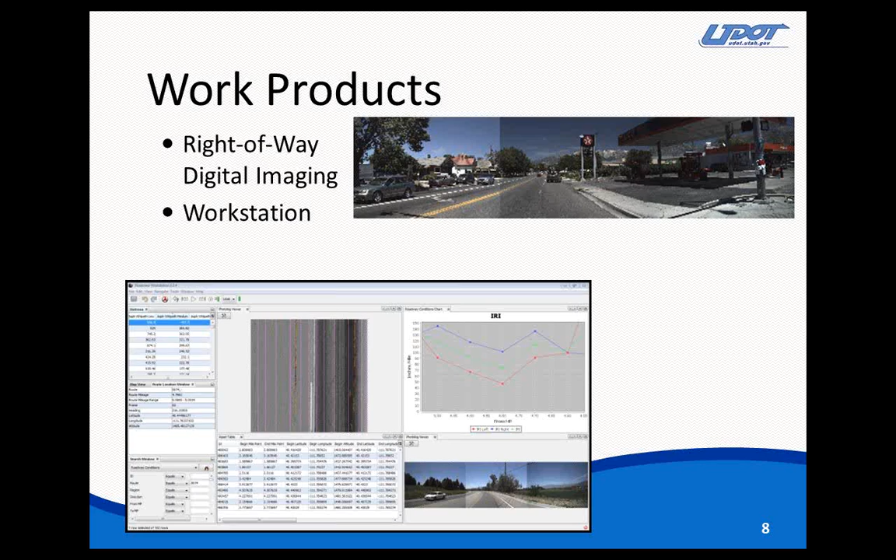Then we're getting a workstation that's combining all the data into one place that can be queried and retrieved and viewed. For example, you see the high-definition right-of-way imagery in the right here. The middle is the downward-facing cameras for your pavement conditions, as well as different tables of data that you can query and move to the data set.

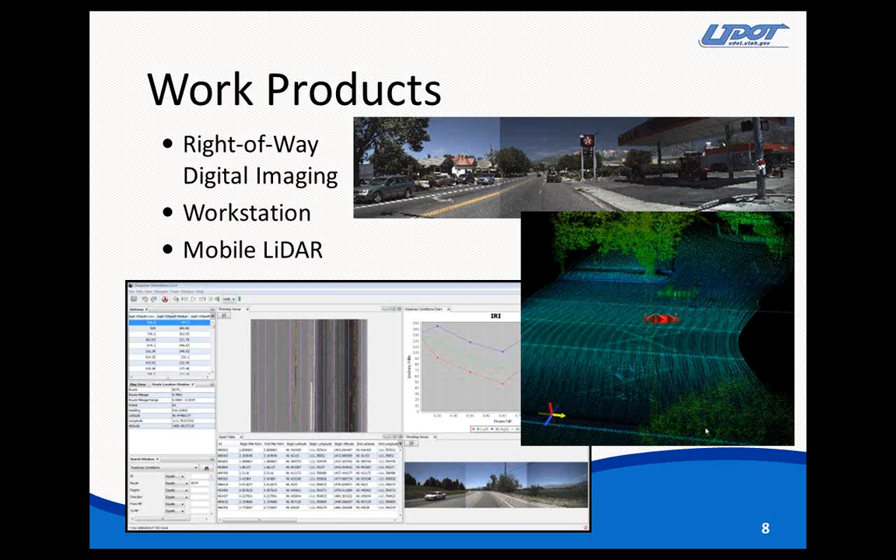And then we're getting a mobile LiDAR imagery of the entire state system. This has the gee whiz and the really cool whiz bang factor of just looking at it and navigating through it. It also has some additional advantages; it wasn't spec'd in the RFP as a requirement that LiDAR had to be used. But it provides additional advantages that we will touch on more as we go through our presentation.

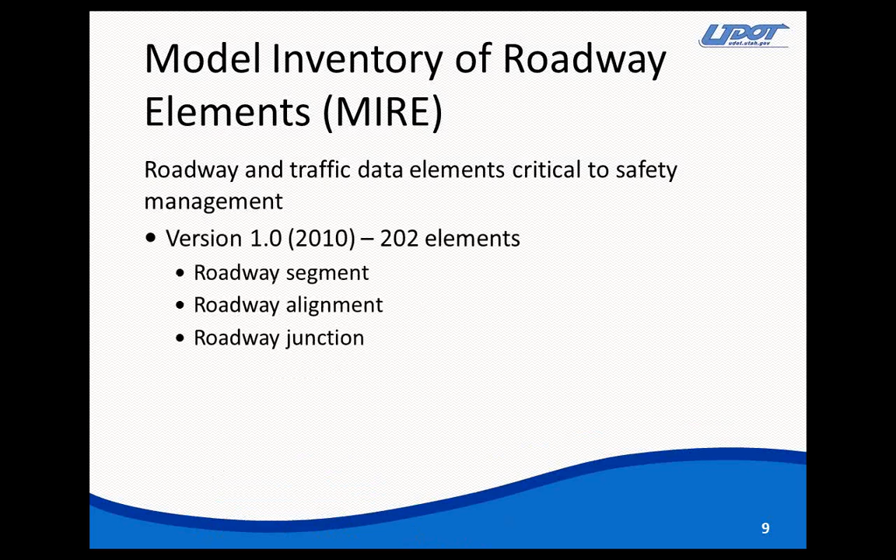I want to point out that we had in mind as we were progressing through this project the MIRE elements, the model inventory of roadway elements that was published by FHWA in 2010, basically FHWA's wish list for what roadway and roadside assets and elements we could collect. We also had the memo in hand from FHWA from 2011 that listed 38 key elements for safety analysis that should be collected and available.

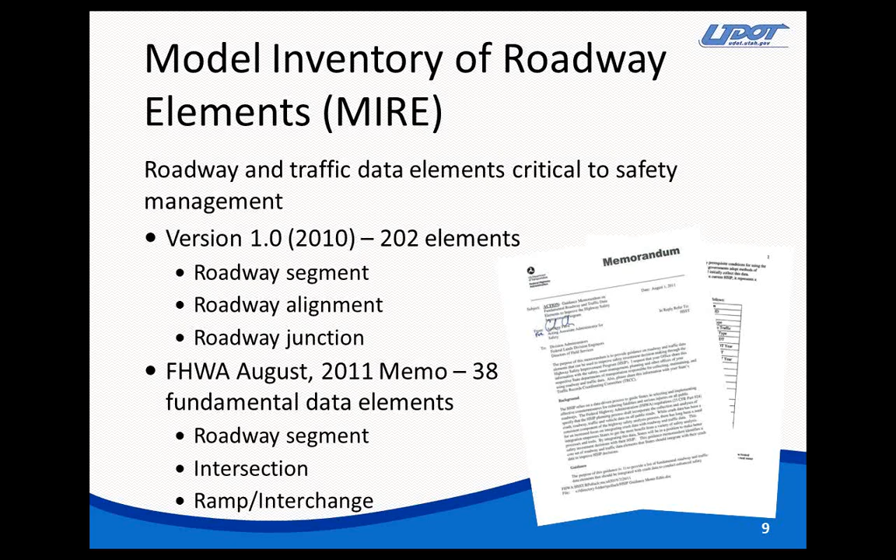In the end, this is high-level categories of what we ended up with in our requirements and what we funded to collect in our project. We have pavement distress, roadway geometry, pavement surface conditions, signs, sign inventory, structures, data of our structures, of our walls, of our pavement markings, intersection inventory, billboards, and our roadside features such as barrier and guardrail.

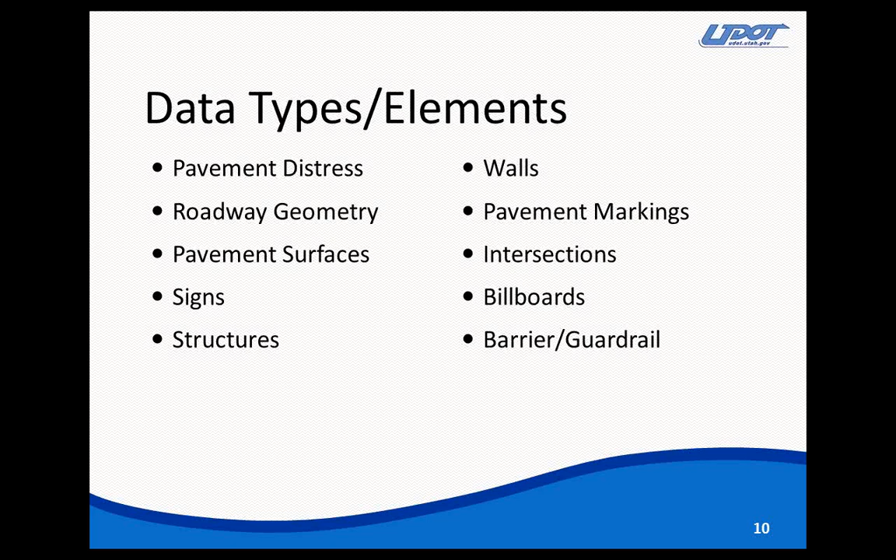We really see the benefit of having all of this data for all of our business groups and systems. We are going to store the data inside our different business systems in the department, which primarily resides within Oracle databases. We are also going to make it available in a GIS data warehouse. And a little bit later in our presentation, we will also highlight some key features of UPlan, as was mentioned in our introduction.

So we are really excited about the idea of, as Stan mentioned, combining our asset management, our maintenance, our safety data elements into centralized locations and workstations where it can all be viewed in one place by multiple users for multiple purposes.

As referenced just a moment ago, one of the key benefits of the LiDAR point cloud is that if we chose not to have certain data elements extracted and delivered to us at this time, it allows us to go back and extract additional elements at a future time, either ourselves or go back and pay the vendor to do that for us, which offers extreme flexibility of not having that anxiety of, are we collecting enough, did we do enough the first go around, as opposed to purchasing the Cadillac up front, if you will.

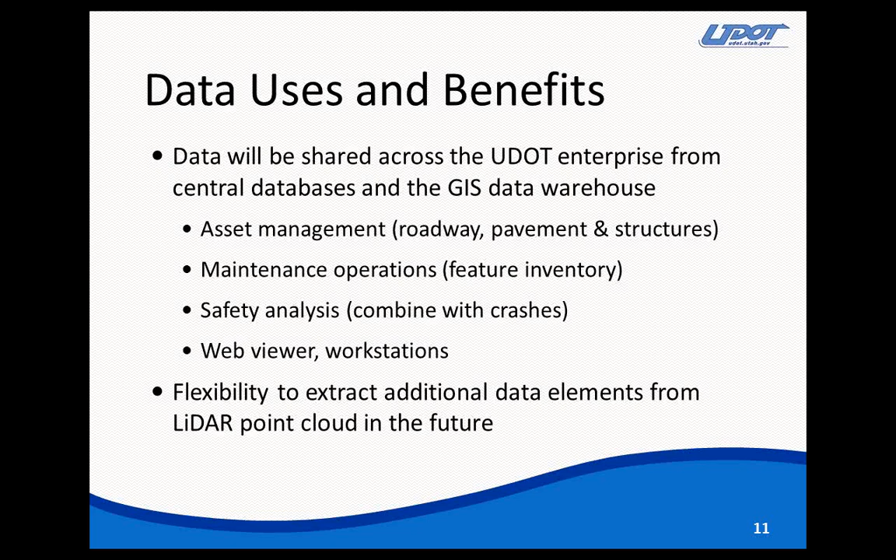So I think it's back to me. Lincoln mentioned the importance of quality control and quality assurance. We have 30 terabytes of data when we're done. 24 terabytes of LiDAR point cloud data, 6 terabytes of images. That's 200 images a mile in each direction, so it adds up quickly. And then we have about a half a terabyte of asset data.

So how does the vendor make sure that this information is correct? How does UDOT make sure it's correct? It's been a challenge. So in the initial RFP, we put several key issues. One, the contractor had to bring an independent firm with them that would provide quality assurance. The next bullet we're looking at, weekly meetings.

We have a stand-up meeting every Tuesday at 3 o'clock with the contractor, and the contractor displays how they are doing quality assurance. And this picture that I have shown there is just one of the ways that they're looking at specific values to see if they make sense. And if not, they look at the photo log.

And so you can't look at every bit of data, so you have to scientifically, strategically look at specific assets, look at them if they're out of range, and then proceed with doing the quality control, quality assurance based on what you learned before. So the weekly meetings are just our gut check that the contractor has a very rigorous quality assurance, quality control program in place.

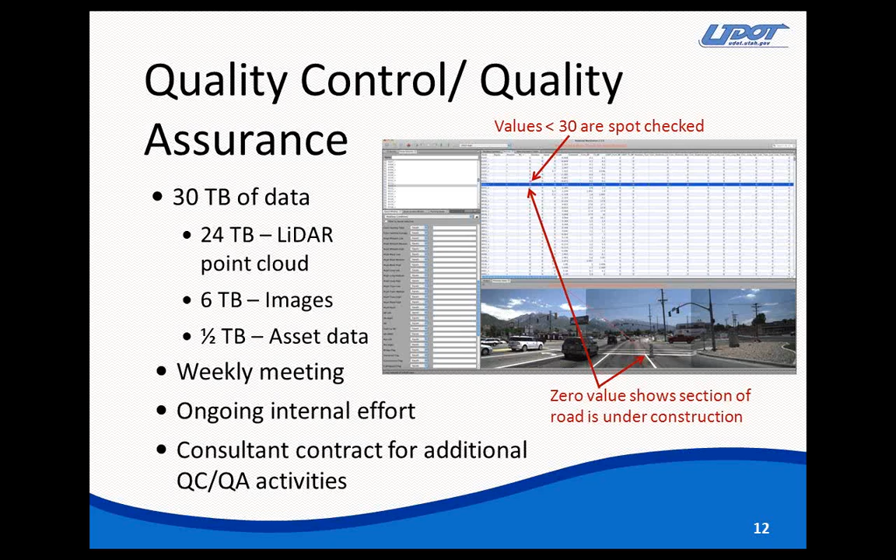So next I'm going to talk to you a little bit about the importance of asset management. First, you have to have asset inventory. The reason why we're doing this project is we want to know where those $30 billion of assets are. We want to know the condition. And from that, we'll be able to put together programs where we can manage that asset.

And I'm going to go through about 4 slides here and describe our pavement management system, because we have a pavement management system that's very robust. It's well respected across the country and within the industry. And we want to model our future asset management programs on our pavement management program.

So having said that, we have a motto here at UDOT called Good Roads Cost Less. And the theory there is if you know where your asset is, if you know the condition, if you know the deterioration of that asset, if you have maintenance strategies for it, you can put together plans that address very effectively the best way to minimize cost and prolong the life of that asset. So it's part of our culture here.

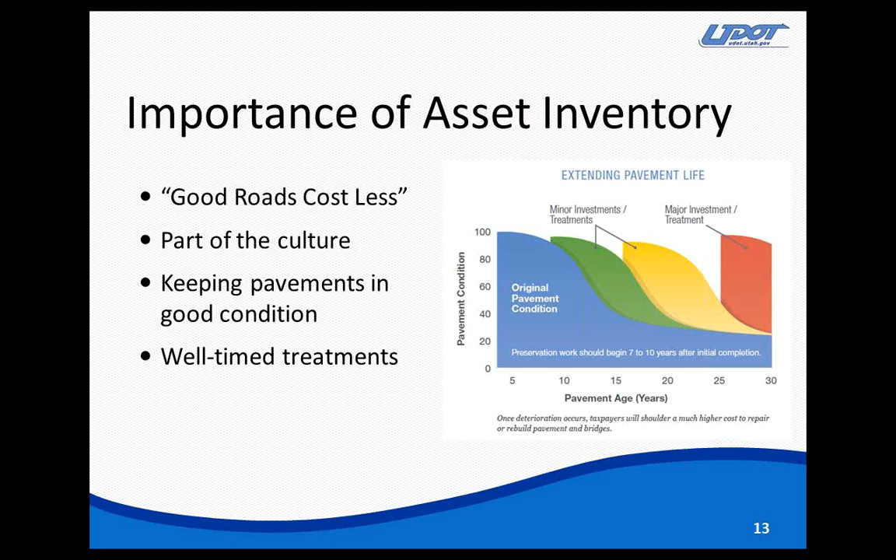It's about keeping pavements in good condition with well-timed treatments. But this applies to any of our assets that now, for the first time, we're going to have the ability to manage, whether it's signs, signals, our safety program. So how do we do this in pavement? For the last 5 years, we've been using contractors to collect pavement distress at highway speeds. They've been driving 17,000 miles, and they're measuring a continuous survey of that pavement surface.

They're picking up cracking, faulting, rutting, and it's a quantifiable amount of faulting, a quantifiable amount of cracking, the width, the depth, the length, and the rutting. And most importantly, this is all automated. The software of the vendor is measuring the length of that crack, the depth of the crack, the width of the crack. So it's not somebody saying, I think this crack is a 7 on a scale of 0 to 10. It's all quantifiable.

And I mentioned before, the technology is changing dramatically. We all know that. This is an indication of how it's changing. 5 years ago, we used to go out and do this by hand. We used to drive out to every milepost, the beginning of every milepost, and we'd try to say what the cracking was, the rutting was. Now they drive at highway speeds. 5 years ago, when contractors first started doing this, it was very labor intensive. The contractor had to look at their monitor and physically bring out their tools to measure those cracks. This is all automated, so the cost is coming down.

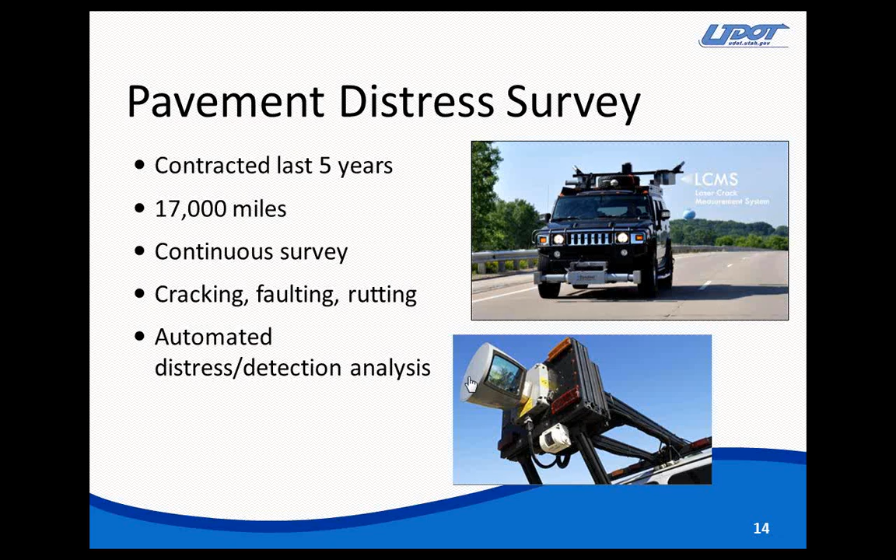And that's what we see. That's one of the reasons why we can do this project, is we see the cost continually coming down. And so our appetite is getting bigger, even though our dollar amount that we can spend on this is staying the same.

So because we have a pavement preservation program where we collect, we know what we have, we know the condition, we can put that into our pavement management system, and out of that comes this graph. This graph is telling us if we spend $200 million on our pavements for the next several years, this is what the condition of our pavements is going to be. This is both past from 2008 to the future 2016.

This is what we need to do for all our assets, our safety. This is quantifiable, measuring what we have, figuring out the best maintenance strategies, figuring out the best treatments to preserve that pavement, and then we can show quantifiably this $200 million will get us this far. We want to do the same thing for safety, guardrails, rumble strips, cable barrier, signals, signs. It goes on and on and on. But because we've developed this program for pavement, we have a model that we can use. We don't have to reinvent the wheel.

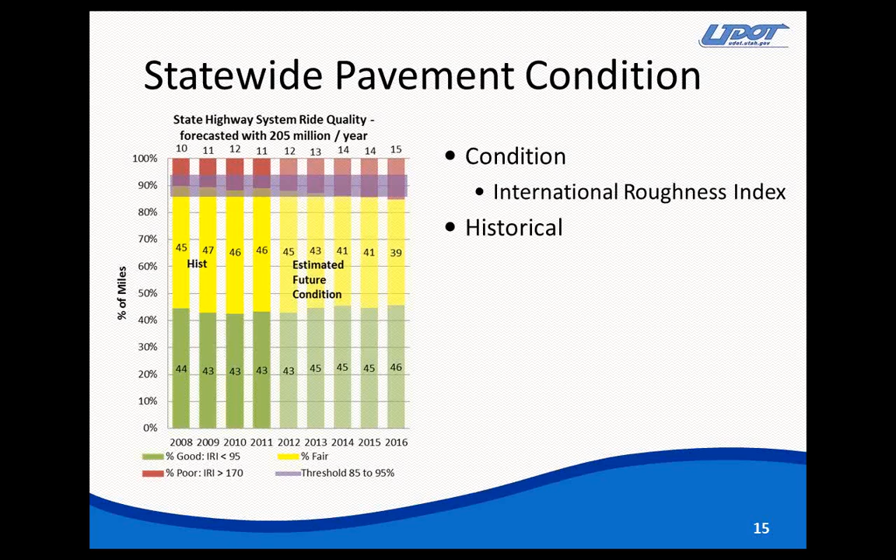And so I didn't pull up these bullets as we were going, but this measures the International Roughness Index. It provides a historical look, and it also provides a forecast with trends and thresholds. Finally, what comes out of this pavement management system is a specific historical pavement condition, but also upcoming projects.

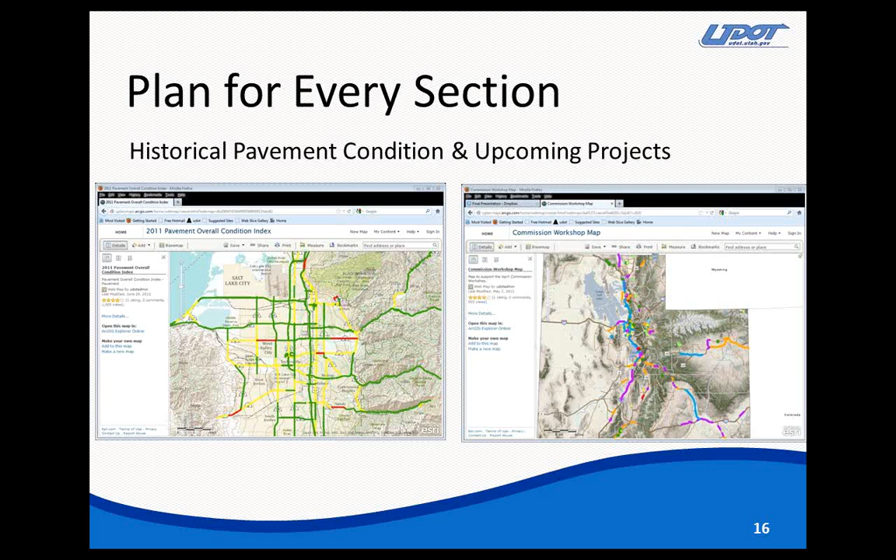So we want to do the same thing for signs, guardrails, safety. If you do these projects, they're the most cost-effective projects. They'll extend the life of that asset. And most importantly, our senior leaders will know if we spend X on safety, Y on pavement, Z on bridge, we have an idea of what that means for the overall health of the system.

But maintenance also has part of the responsibility for taking care of signs. So I asked maintenance the next day, how many signs do you think we have? And I didn't tell maintenance Scott's answer. And they said 100,000 signs. And so the question is, how can you possibly manage this asset if you have no idea how many signs you have, let alone where they are, the condition, the deterioration of those signs, maintenance strategies to prolong the life? How can you put together a plan?

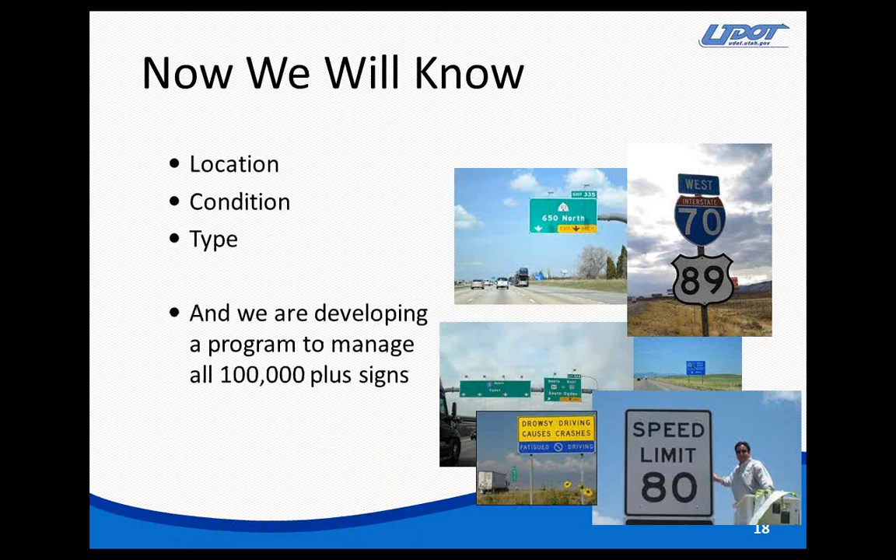Remember the slides I showed you about pavement? How can you do any of that for signs? So before you can have a credible long-term program with funding recommendation, forecasting models, would you know the location, GPS mileposts of those signs, the size of them, the type, the condition, the retro, the good, fair, poor? Well, now we'll know how to do this because we'll know the location, the condition, the type, and we are working now with industry to develop a sign management system for those 100,000 plus signs. So now I'm going to turn it back over to Scott.

So as required and as maintained by all states, we have an inventory and a database of our crashes. As Stan has so well demonstrated and introduced, we haven't had a similar database and inventory of our assets, particularly assets that affect safety. Also, developing but not mature to this point has been a really good, comfortable grasp of our roadway geometry down to our cross-slope, super elevation, horizontal and vertical alignments, that sort of thing.

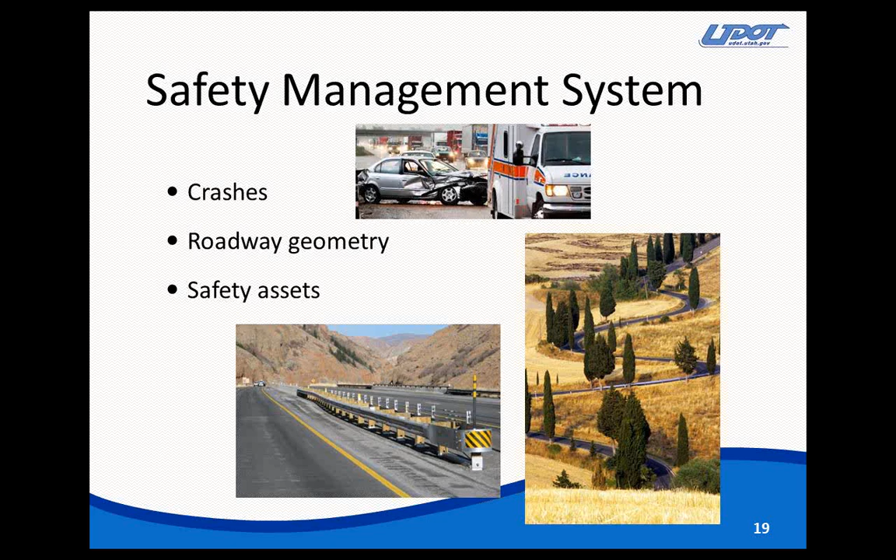Our plan with this data is to indeed combine all three of those elements and create a true safety management system that is able to analyze all of these elements to optimize safety in the state. To do that, we even had to take our crash database, which is quite robust and complete, and tweak it to fit into this model. So traditionally, as most states have, all of our assets are located by route and mile point. Well, as we move into this world, we have strived to convert everything in our crash database to a geospatial location system.

By combining those crashes in that geospatial location system with our advanced GIS tools, we can start telling the picture to our leadership and to the public with a safety-focused message that is different than just our traditional method of looking at a column or a chart of data, where most people's eyes kind of glaze over when you try to explain what you're telling them. So we can start doing those type of analyses by spot, by corridor, statewide rankings and priorities, and display maps such as you see below to justify spending our limited safety dollars on the projects we want to spend.

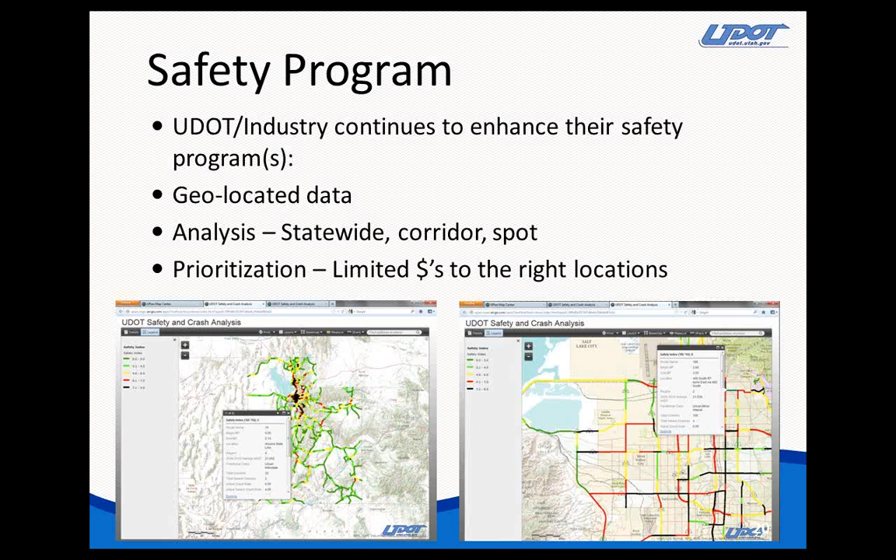This takes us to U-Plan. U-Plan was started by planning and programming as a way to combine planning level data to do scoping reports for our long-range plan. It has developed into a platform to share all of these different data elements that we've been discussing today in a geospatial format. We have just finished an ambitious effort to upgrade U-Plan to an online format that leverages ArcGIS Online. And included in U-Plan are layers for safety and crashes, as well as all these other data elements that we will be combining together in a useful and easily accessible format.

I think I covered most of these points here as we were on the last slide. I can't emphasize enough what the GIS platform brings to us, in that all of those interesting and creative analyses that people come to you and say, what if, or can we do this? All of a sudden you're not constrained by your own data sets and your own databases.